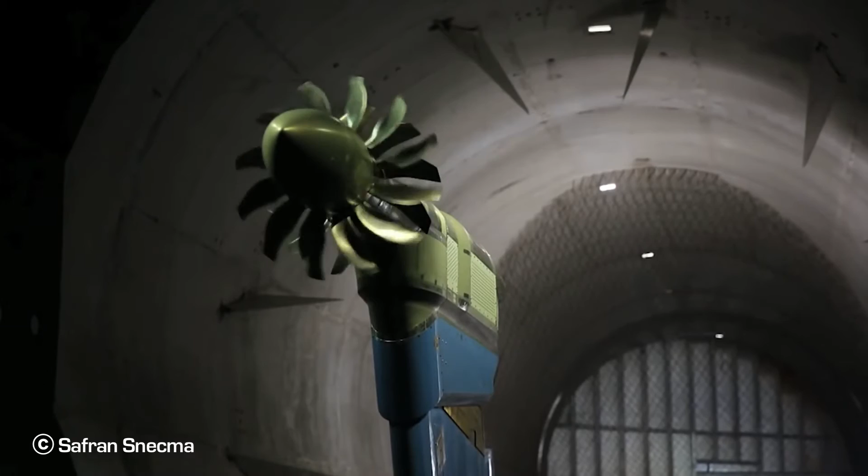The introduction of flexible elements, such as the solar arrays of a satellite or the blades of an open rotor, may also involve large displacement and complicated dynamics at the interconnections. As a consequence, modern structures are more prone to operate beyond linear regimes of motion. They behave nonlinearly.

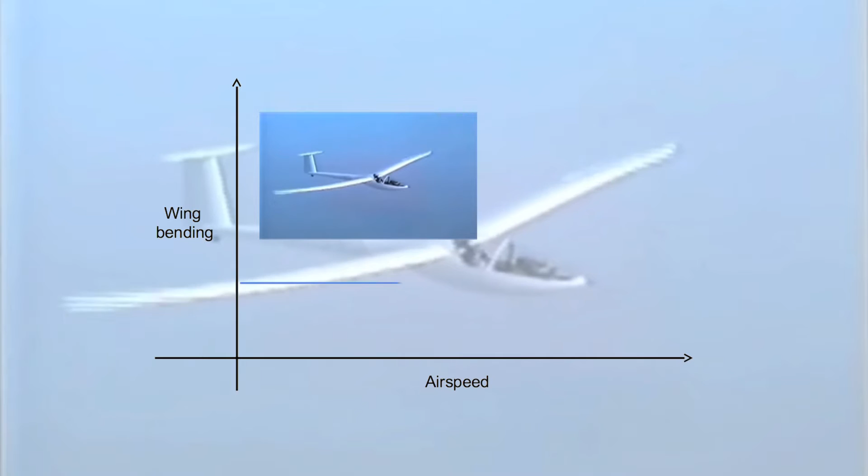A peculiar feature of nonlinear structures is that, for the slight variation of a parameter such as the airspeed or the excitation frequency, undesired vibration can be suddenly triggered. Let us consider the example of this glider. At lower speed, the wings do not vibrate. As the airspeed is increased, this equilibrium state turns unstable and fluid-structure interactions generate limit cycle oscillations.

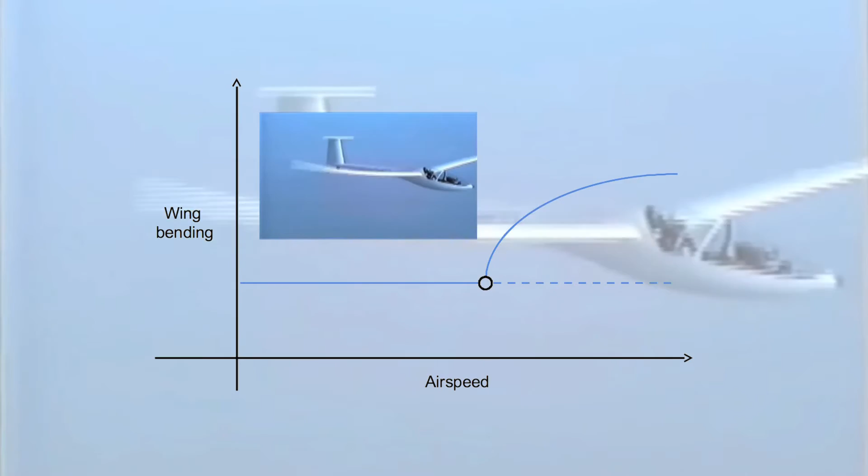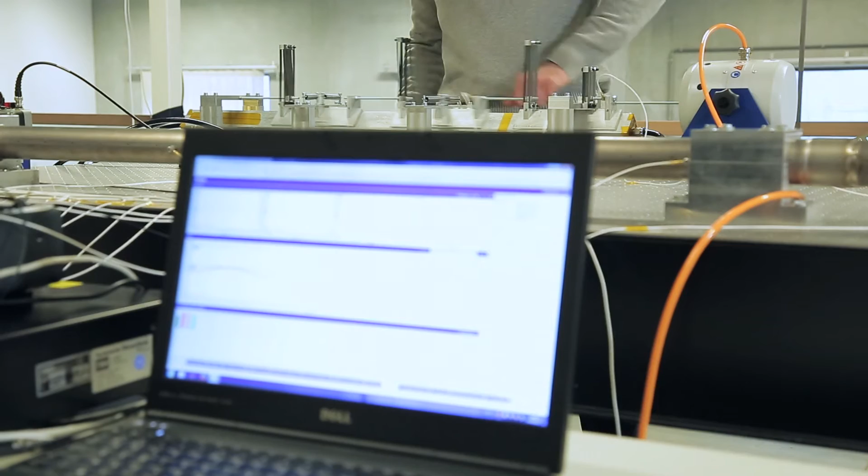This type of phenomenon is related to the presence of bifurcations in the system's response. Many examples of bifurcation can be found in aeroelastic systems such as bridges or aircraft. When a nonlinear structure is operating in a linear regime of motion, only one periodic response exists at a given excitation frequency. After a perturbation like a small impact or a wind gust, the system will recover the same response.

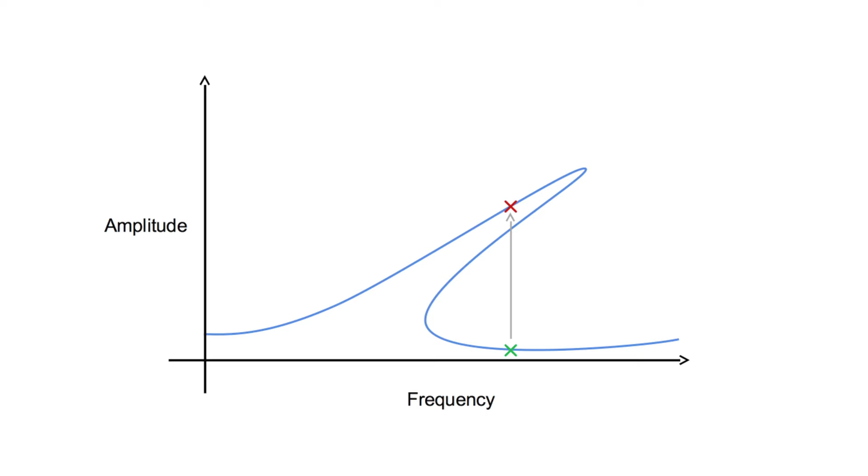At higher excitation levels, however, the activation of the nonlinearities will modify the shape of the frequency response and will create a bistable region. In this region, a low amplitude response may jump to a high amplitude vibration after a perturbation. Fold bifurcations set the boundaries of the bistable region. These bifurcations can be found near the nonlinear resonances, and they are responsible for the amplitude jumps.

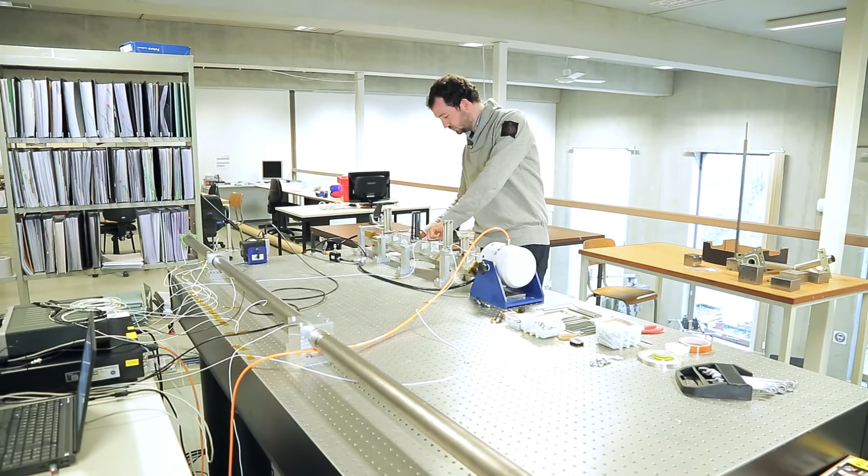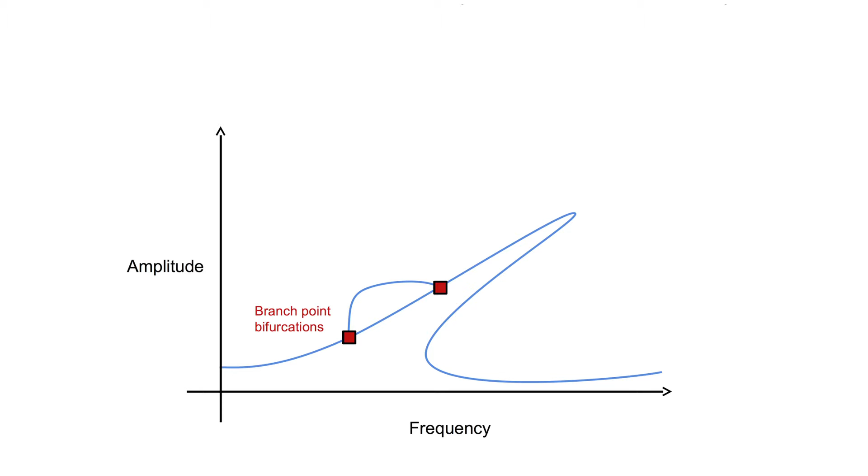There also exist other types of bifurcation. At branch point bifurcations, for instance, an additional branch of periodic solution is created. The Neimark-Sacker bifurcations generate quasi-periodic oscillations with potentially higher amplitudes than the resonance peak itself.

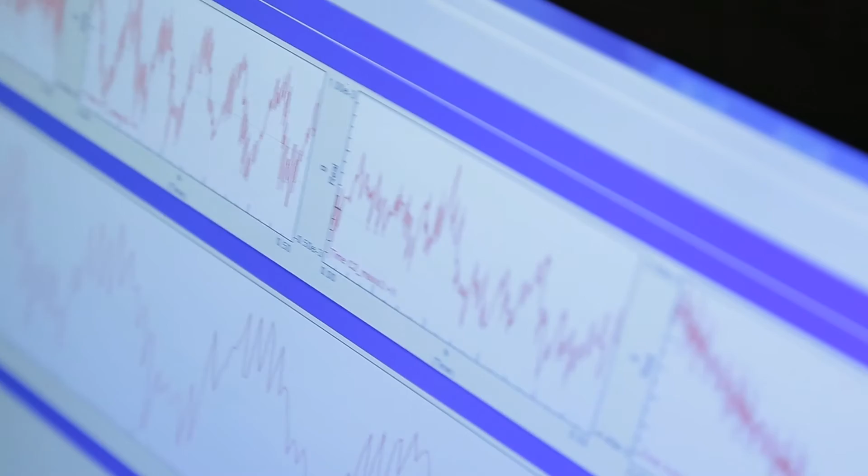As the dynamical changes described previously may jeopardize the integrity of the structures, bifurcations certainly deserve special attention. They should be considered by engineers in their numerical simulations and must be anticipated during test campaigns or experiments, like here in the wind tunnel.

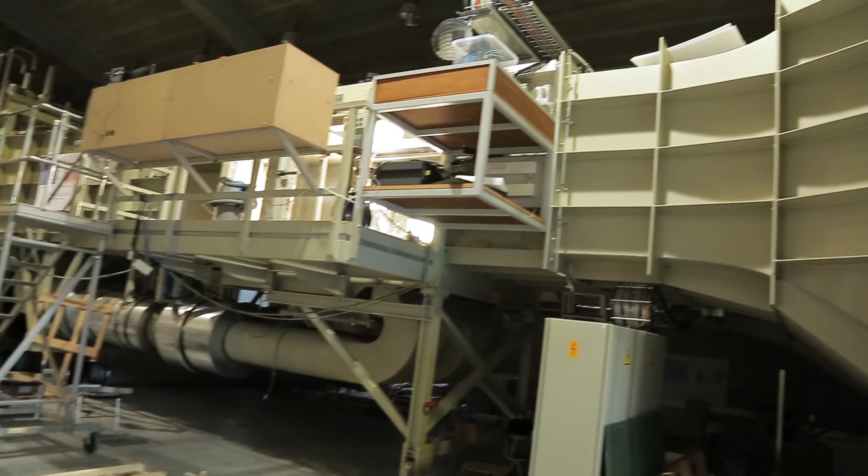Although industrial structures also suffer from adverse phenomena due to the presence of bifurcations, numerical methods to study bifurcations could only be applied on small-scale academic systems. In this context, my thesis developed a new computational framework intended to bridge the gap between bifurcation analysis and industrial applications.

The starting point of my work was to select a formalism to compute nonlinear frequency responses and normal modes. In that regard, the harmonic balance method was the most suitable candidate. This technique consists in approximating the unknown periodic solutions of the equations of motion with Fourier series. The resulting algebraic equations to be solved do not require any time integration that could be costly.

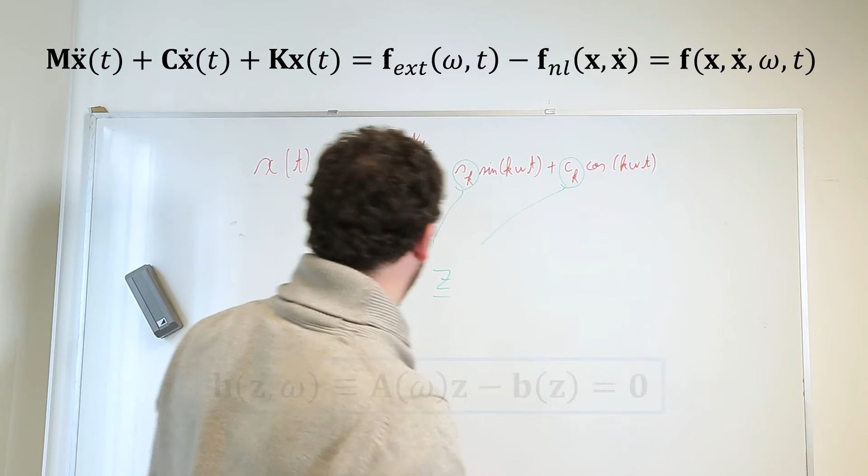Moreover, the number of unknowns can be reduced by decreasing the order of the Fourier series approximation and hence neglecting higher harmonics that are usually damped out in experiments. For this reason, the harmonic balance method is very efficient for large-scale systems. My efforts were then devoted to extend the harmonic balance formalism to perform bifurcation analysis.

In order to apply my tools on large finite element models while ensuring a limited computational burden, I developed a framework that builds on several techniques. These techniques are a continuation procedure to compute branches of periodic solution iteratively, and the monitoring of test functions to detect and characterize bifurcations. Finally, a bifurcation is detected when a specific matrix, let's call it capital G, gets singular.

Because dealing with matrix determinants may be difficult for large systems, and in order to avoid ill-conditioning, I propose to use the bordering technique. The resolution of the bordered system provides a scalar, small g, that vanishes when the matrix capital G is singular.

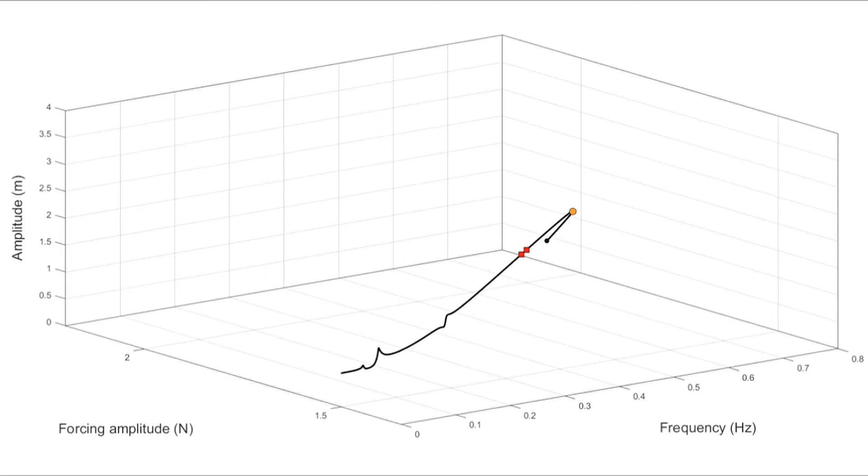Let us now apply the proposed algorithm to compute the frequency response of a nonlinear system excited at 1.5 Newton. Along the frequency response, branch point bifurcations in red and fold bifurcations in orange are detected. Let us now imagine that we are interested in the evolution of this resonance peak as we increase the forcing amplitude. A trivial way to proceed would be to compute this frequency response at the value of 2 Newton.

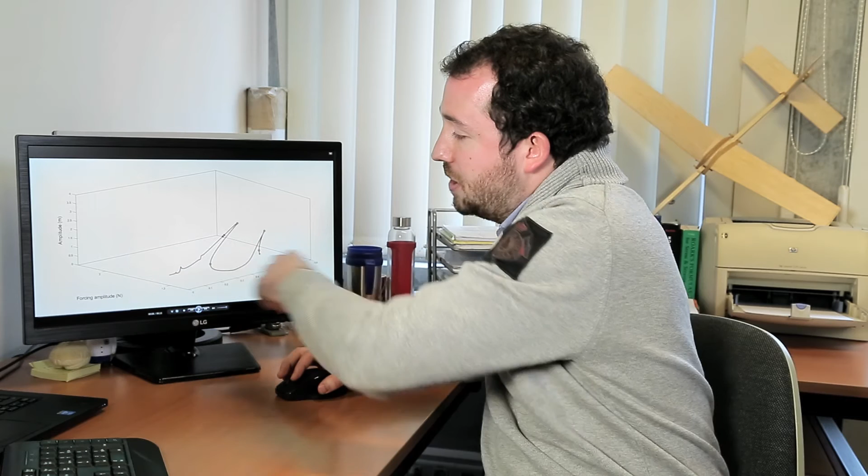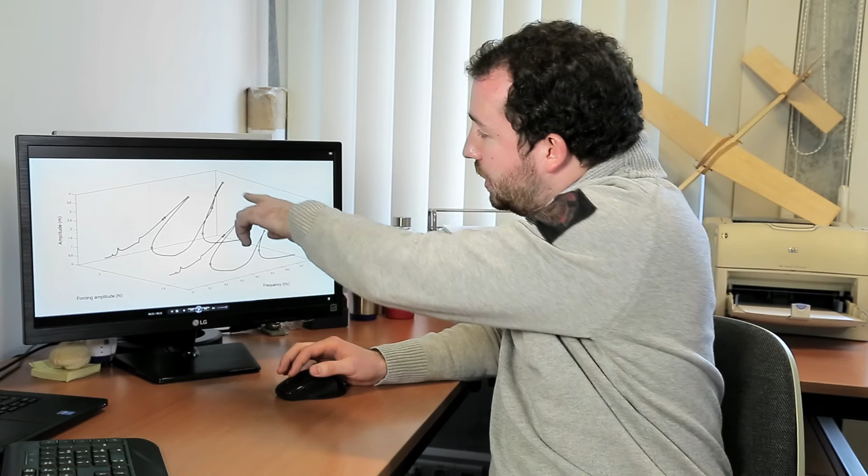This way, however, we have to recompute all the portions of the frequency response. Some of them might not necessarily be interesting. Therefore, I propose an efficient adaptation of my framework to track bifurcations in the parameter space. Let us apply this technique on the fold bifurcation right there. Obviously, using this method, we are now able to really focus on the bifurcation and obtain the evolution of the resonance peak immediately. Applying this tracking procedure to the Neimark-Sacker bifurcations that appeared at 2 Newton, we are able to predict at which forcing amplitude these two bifurcations are created.

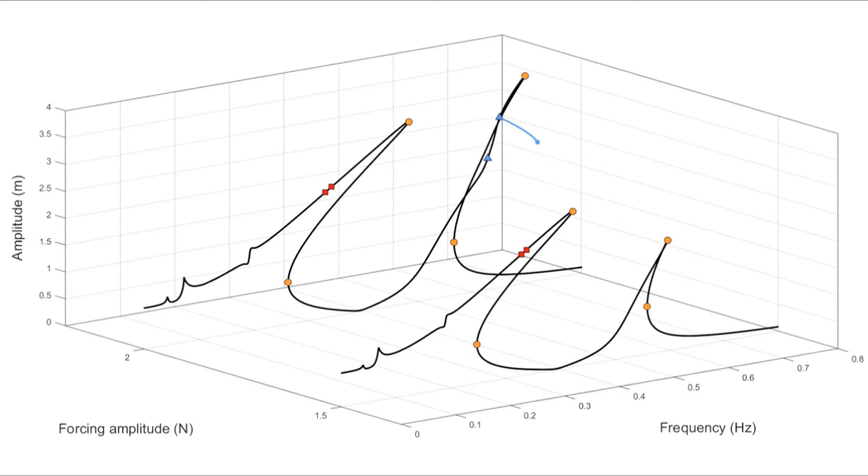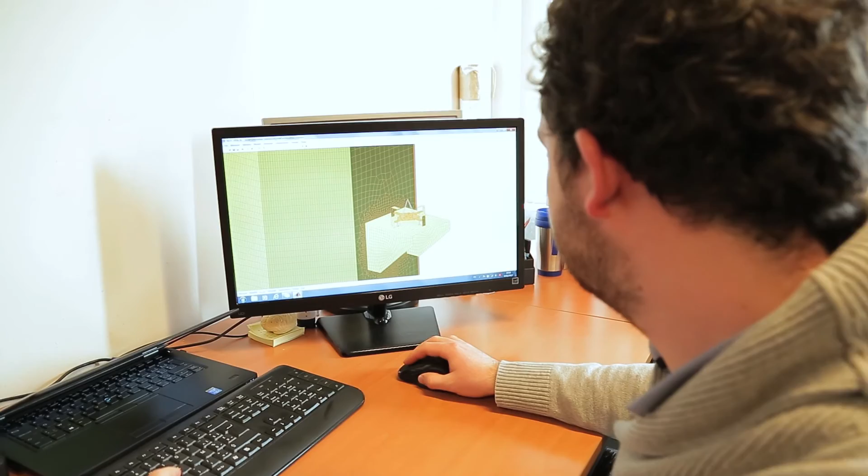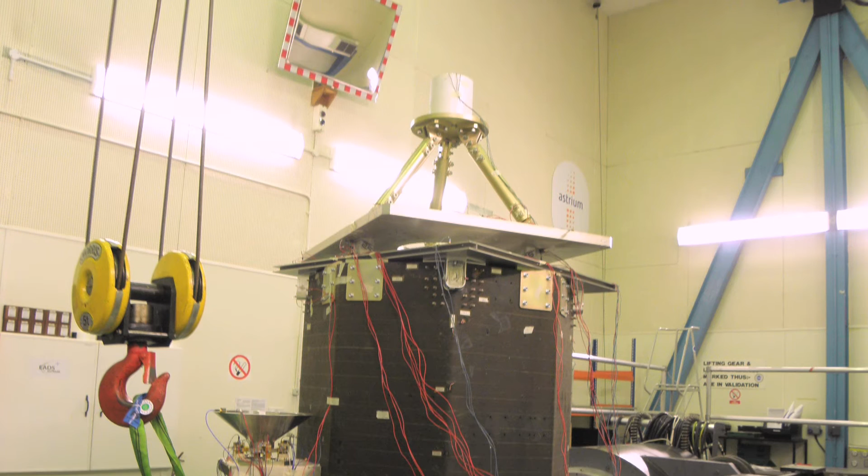An important step in the thesis was to demonstrate that the bifurcation detection and tracking methodology could be applied to industrial cases. To this end, I validated my developments on the numerical model of the SmallSat spacecraft. The SmallSat spacecraft was developed by Airbus Defence and Space and possesses an inertia wheel for attitude control. Elastomer plots and mechanical stops were introduced to mitigate micro-vibrations emanating from the wheel and large amplitude oscillation during launch. These connections feature piecewise linear stiffness curves due to the impacts with the stops, and thus involve nonlinear dynamics.

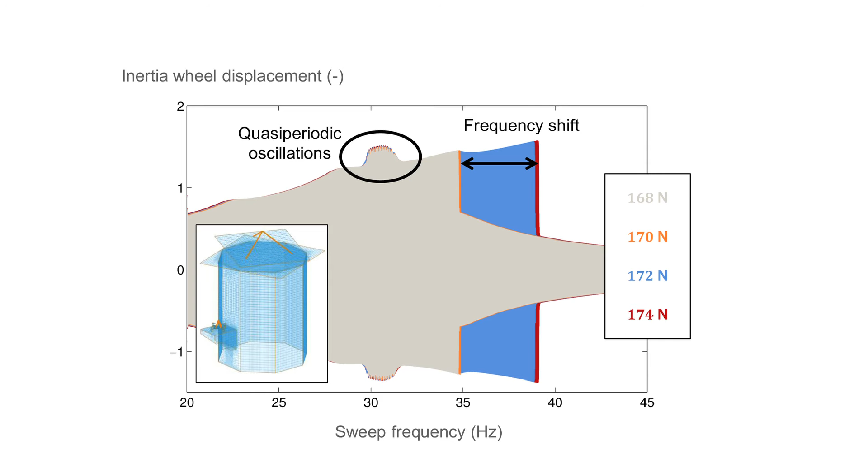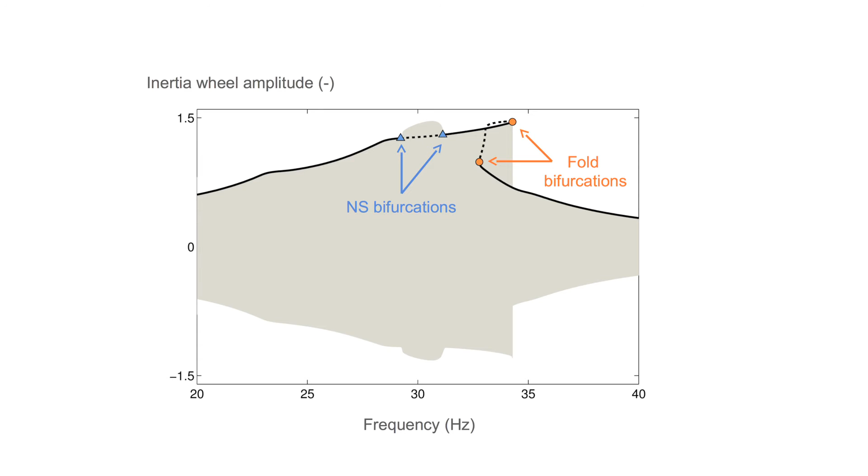First, simulations of swept-sine responses were performed on the nonlinear finite element model of the spacecraft at different forcing amplitudes. These simulations indicated the presence of quasi-periodic oscillations, but also a sudden shift in the resonance frequency of the sixth mode. With my research developments, I could then reveal the presence of Neimark-Sacker bifurcations near the quasi-periodic oscillation and of a fold bifurcation near the resonance peak.

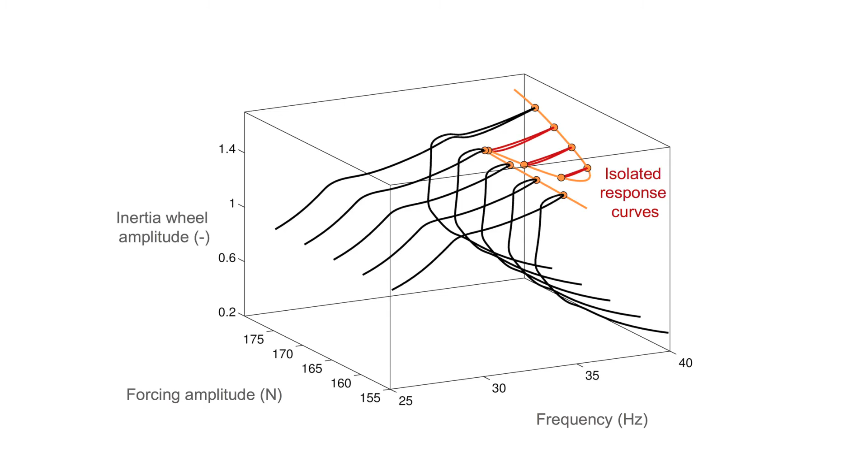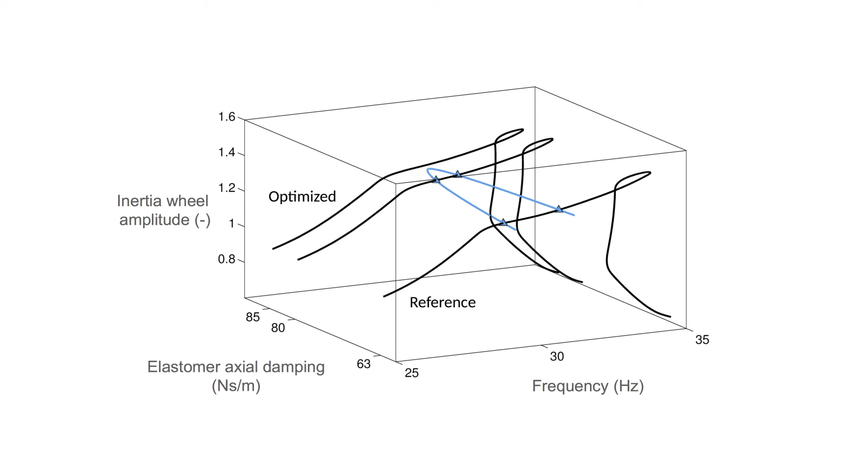Tracking this fold bifurcation highlighted the presence of an isolated response curve that expands as the forcing amplitude increases and finally merges with the main frequency response. This phenomenon, that had never been discussed in the literature for an industrial application, explained the frequency shift in the time series. Bifurcation tracking proved useful to understand the dynamics of the structure, but was also proposed for design purposes. By studying the influence of the damping introduced by the elastomer plots, I showed that the design of the structure could be optimized to eliminate the Neimark-Sacker bifurcations and thus the quasi-periodic oscillations.

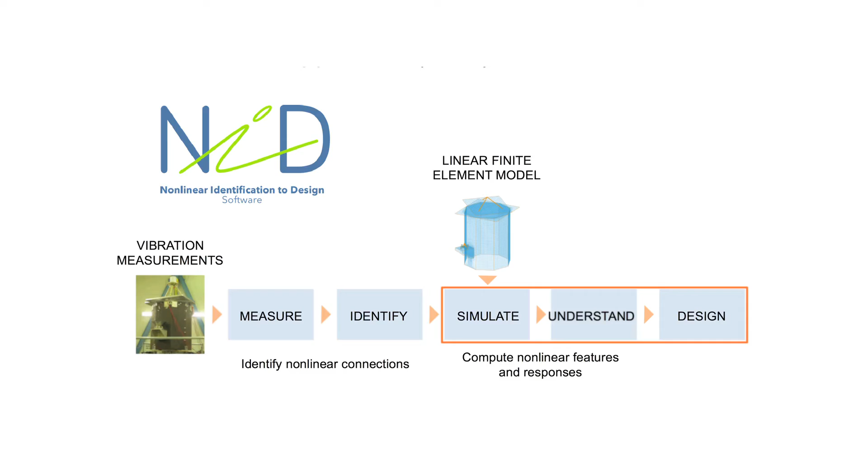The efficiency and robustness of the framework I proposed motivated its implementation in the NI2D software. This software has been developed in my lab to perform advanced vibration analysis of nonlinear structures from measurement data to design optimization. My contributions in this software for bifurcation analysis are currently being tested by industrial partners. Robert Kuether, working at Sandia National Lab in the USA, is one of them.

My name is Robert Kuether, and I am a senior member of the technical staff at Sandia National Laboratories. Sandia is a research and development national laboratory for the United States government. The continuation and bifurcation tools that are implemented in the NI2D software provide an excellent platform for Sandia engineers such as myself to use advanced analysis tools to better understand the nonlinear phenomena in vibration responses. I've used the NI2D continuation code to compute the nonlinear normal modes of nonlinear reduced order models, which helped serve as a convergence metric for models of varying fidelity.

The tools I developed during my thesis and their validation on large-scale models and by industrial partners show that advanced study of nonlinear vibrations and bifurcation analysis can now be performed by engineers.